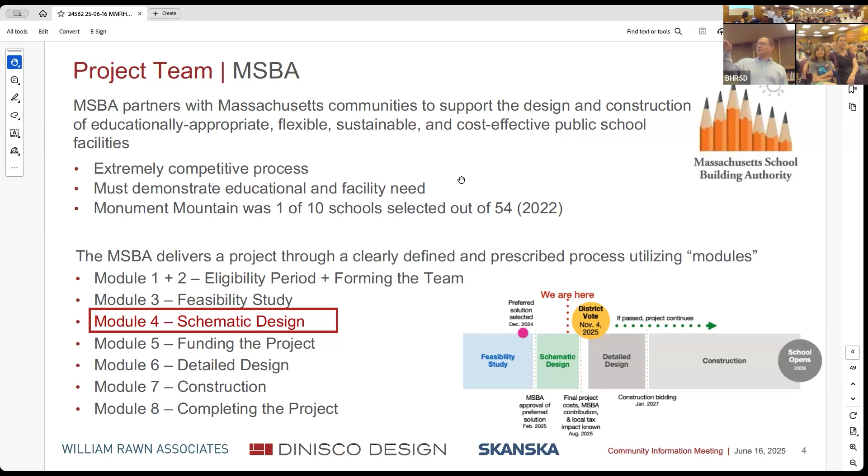Great, thank you. So there's different modules when you team up with the MSBA, module 1 and 2. You can see the eligibility period, forming a team, which we did. Module 3 is the feasibility study, and right now we're at the schematic design, where we're actually seeing what exactly a new building would look like and how it would help us. I don't want to go too long because we have a lot of great slides and information to get to. But that's basically where we're at. The next step would be the funding, which is a vote on November 4th for the communities to decide if they want to fund this project, and we'll go forward from there.

So again, Monument, what we need, there's broad consensus that we need an updated school. This was realized 15 years ago. The school was created in the late 50s, early 60s, educational model, opened during the 60s. For the first 30 or 40 years it served its purpose, but it's come to the end of its life cycle.

It does not meet our current educational needs. It limits our ability to support high quality learning. And it's the only high school in Berkshire County built in the 50s, 60s, or 70s that has not been either completely renovated or replaced.

In Williamstown, Mount Greylock had a complete renovation as well as a significant addition. Wahconah in Central Berkshire has a completely new school, and Taconic High School in Pittsfield has a completely new school. Those are the other schools built during this time period.

This school right now is not a reflection of who we are. It's an aging facility that has exceeded its useful life, and to continue to invest in this outdated building with limited educational benefits is just a bad return on investment.

We've really come to the point, and there's all this information online. I'll be happy to talk with you after, but we've come to the point where this building has gotten to the end of its useful life.

And to just fix up this building to basically get a new HVAC, new roof, bring it up to code, the price there is basically the same as if we've just built a new school. Again, we can talk about that after if you want.

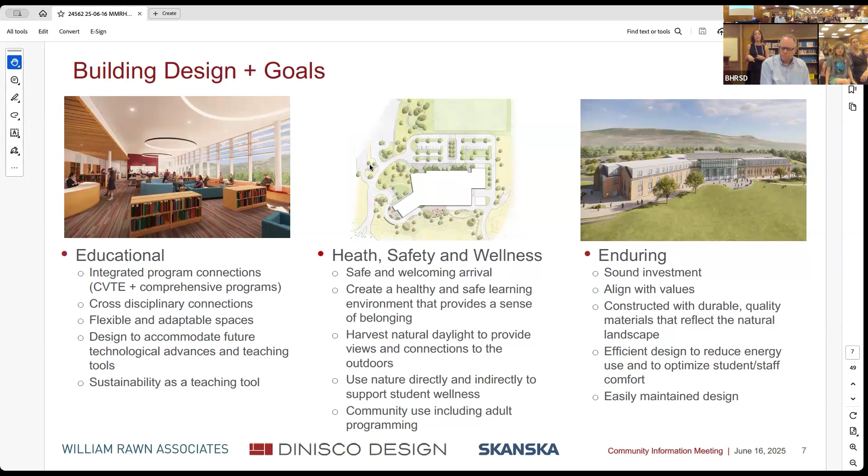From a sustainability perspective, the state is driving a lot of sustainability decisions in our day-to-day lives, but it was really important that we think about the future for this building as well. It will be an all-electric building. We will utilize ground source heat pumps, also known as geothermal, similar to what you have here in the district, but this is an updated technology and newer version.

It was important to make sure that we reduce our carbon emissions and embodied carbon and create a healthy indoor environment. We have already registered with LEED, and we are targeting to be LEED Gold certified, which is really impressive for a building this large.

We're tracking energy use to be very, very low, 25 EUI energy use. Standard baseline schools in Massachusetts are in the 50s and 60s. So we are tracking and making sure that every decision we make is also a good decision as it relates to sustainability.

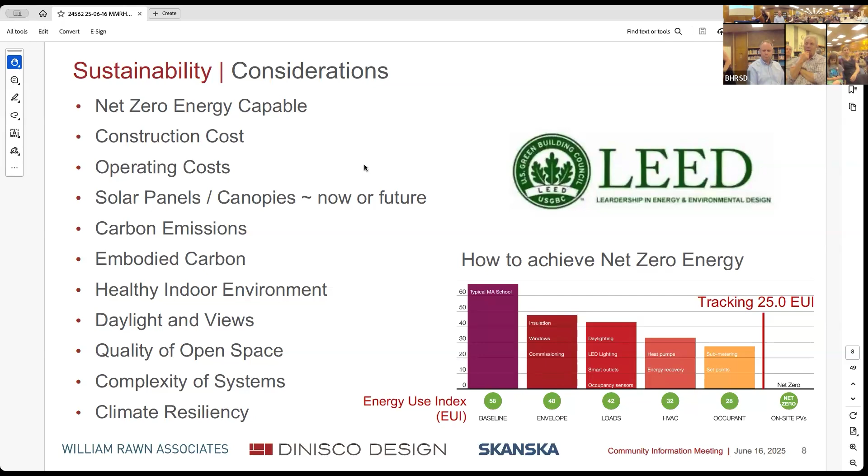We actually started back in February. We wanted to test the ground to make sure it would be able to accommodate ground source heat pumps or geothermal. We drilled one well. If anyone drove by, you'll see these massive rigs that were on the site in February. We're really excited to say that the conductivity of the wells is allowing us to do this, and it will be successful.

Not every site can accommodate these ground source heat pumps, but you can see all the dots here represent about 110 wells that we're anticipating needing. We have one drilled, so now we need 109. I feel like 99 bottles of beer on the wall, sorry.

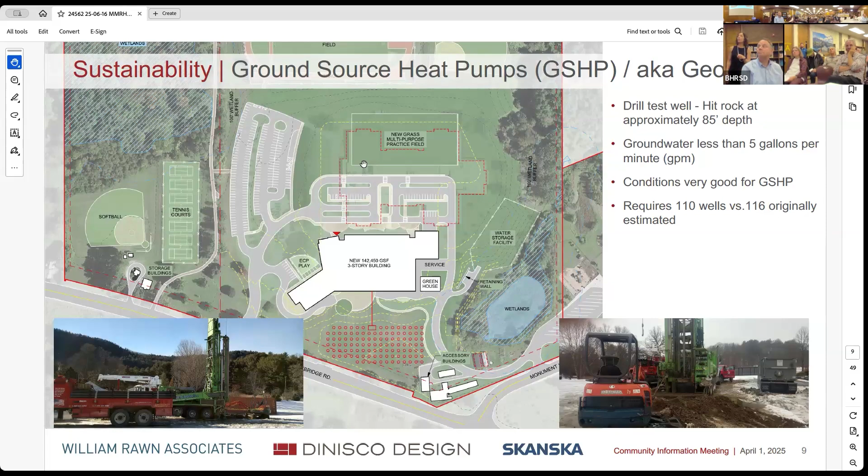The new school, I'm going to jump to this slide. The new school is going to be located, you can see the dotted red line, that's your existing school, right there if you can see it. We're going to be building it directly in front of it, to the west, building it into the hill to take advantage of the topography to help reduce costs.

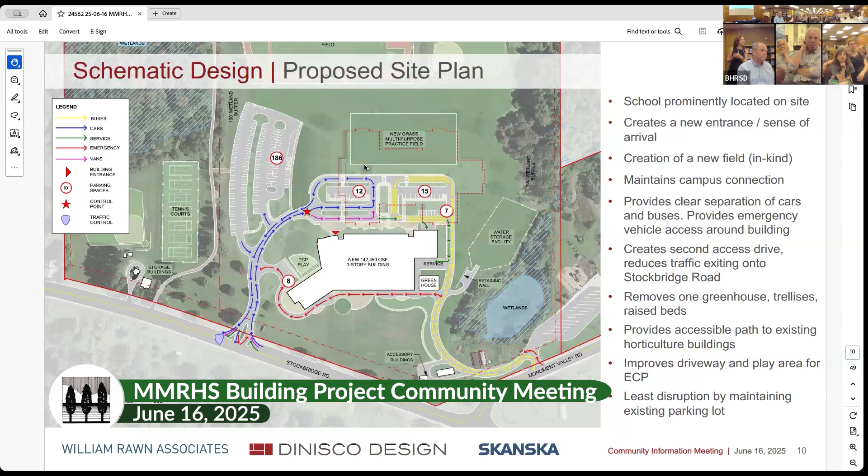It will be a 3-story building on one side, 1.5-story building on the front side. We'll show you some renderings. There are some renderings over there, but we have some that will be easier to explain as we go through it.

Our goal from a cost perspective was to utilize as much as we possibly could with your existing attributes on the site. We are going to maintain the existing parking lot. We'll build the new building in front of the existing building, which will remain in operation while the new school is being built.

And once the new school is built, we'll move everyone in, demolish the existing building, and then we'll be able to actually put another practice field in its place. We have spent a lot of time working with your first responders, your police, your fire, state troopers, and the school department to make sure we could improve upon your site circulation.

We're continuing conversations with the Department of Transportation about the entrance of the school. So for now, we're trying to find ways to really reduce the traffic congestion that occurs on site. We now have 2 means of egress onto the site.

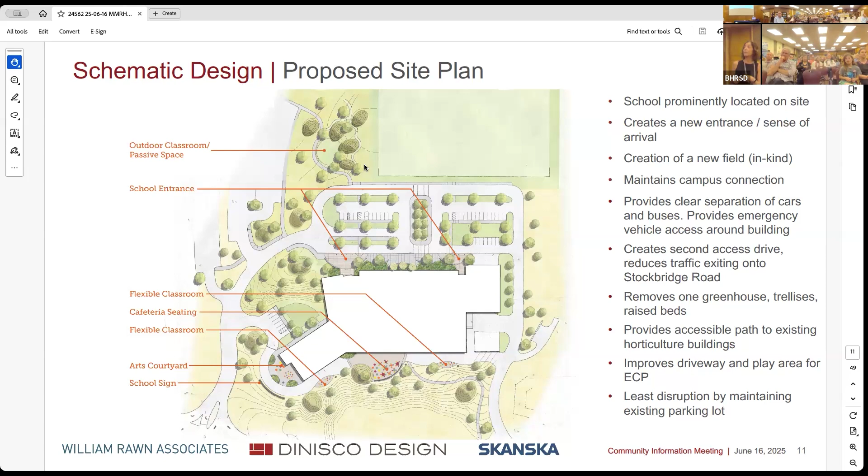We'll talk about whether there are other opportunities on site. The full site will be accessible. Right now your site isn't accessible for anyone, even coming from the main parking lot, so we'll have path and pedestrian accesses, making it fully accessible.

Right, guys, you're seeing this, right? You're seeing the struggles. Here is the view—thank you.

The school is going to be a 3-story school facing Monument, facing Stockbridge Road, but the main entrance is going to be on the middle floor, which we're calling the ground floor. So you enter on the middle floor, and this is the driveway coming up.

The parking lot is over here to your left. The main drop-off area for parents and buses is along this axis up here that you can see.

We have the main office located at the very entrance of the building—no longer, for anyone that took a tour, you probably had no idea where the main office was, right?

So we'll have the main office at the front of the building. It will be a secure, double-locked vestibule to make sure that people coming in have been vetted before they're allowed into the building. Main administration will be located here.

On this main floor, it was really important to provide all the community spaces. We have the auditorium right in the center, adjacent to the gymnasium in red. We have the PE alternatives, which will be a weight room and fitness center, which could also be used for community access. We have our chorus, band, and piano theory classrooms adjacent to the auditorium for those connections. And then the automotive program, as I was pointing out, needs public-facing access to the driveway, which will also be located here, shared with the new electrical CVTE career tech program.

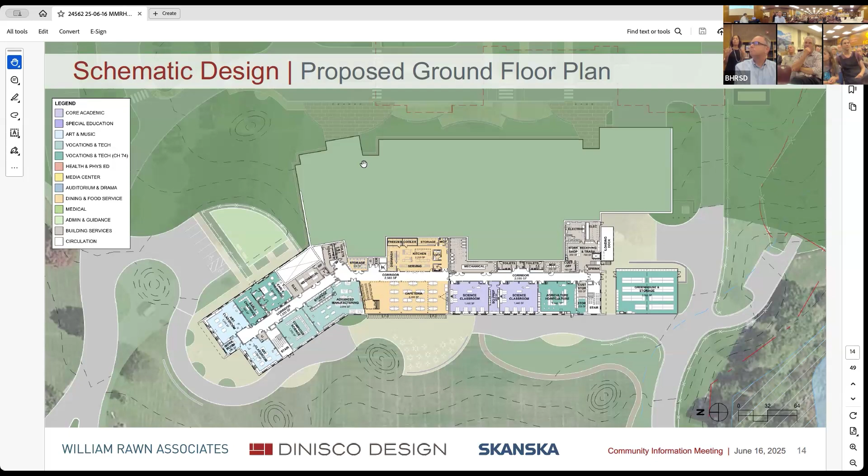You can see we were really thoughtful about the placement of programs. Every single classroom will have windows — everyone is going to have natural light and great views. We were also very thoughtful about what you're seeing in brown, which we call service areas — these are the mechanical rooms, storage, and receiving. Those spaces don't require natural light. We're also taking advantage of the topography of the hill to reduce site costs.

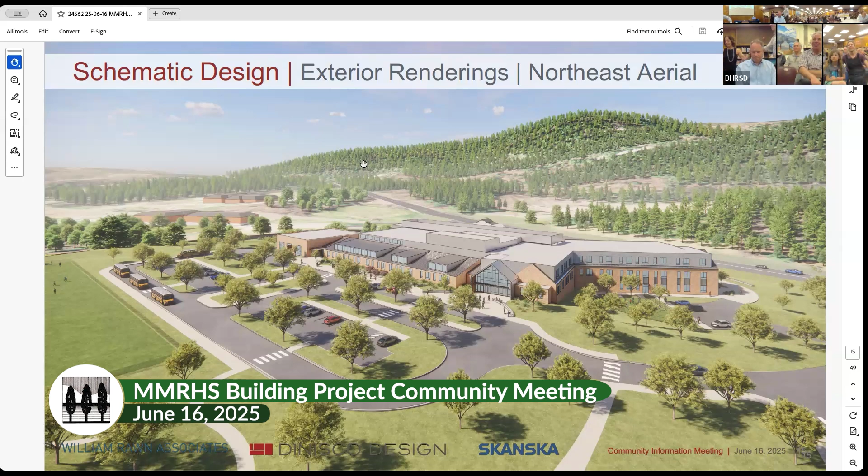So I was going to share some exterior views of the building. First of all, I want to thank the exterior design subcommittee and the school building committee — it was a great collaboration, both of our firms working with these groups, with a lot of feedback over several months. So that's what you'll see here.

One of the major goals was to make the high school welcoming to all, using warm materials — really trying, as you approach it from Stockbridge Road or come up the drive, to make the entrance intuitive.

This is a view from the northeast, looking at that main entrance. We worked to make that entry transparent and open, so much of the glazing or glass was placed at the main entrance. You'll see in a moment, on the other side, views of Monument Mountain, which you can see in the back of this rendering or in the distance. Just for reference, the elementary school and the middle school are off in the left corner.

There's a pointer — yes, okay. This is, as Donna described, the field to be relocated, so it will actually be closer to the existing playing fields.

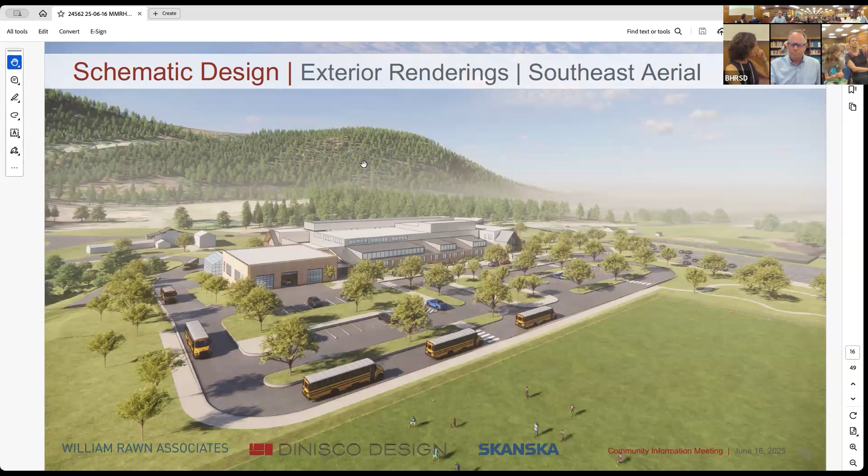This is a view from the southeast. Here you can see the drive coming up from Monument Valley Road and the existing greenhouses — this is where the buses will queue up. On this side, you can see the automotive CTE program, which has some parking spaces here.

That's the main school entrance. This is a view down at driveway level, looking at the main entry. It's welcoming—there's a bench, quite a bit of open space when the students are dropped off.

To the left are the music spaces. Again, Donna said it's about a story and a half on this side of the building.

Andy, may I—there's a question, hand raised online. Yes, if they can hear us, Brian, maybe you can unmute them and they can ask their question.

Hi, Sam Ernston, Great Barrington, Division Street, and a teacher at the middle school. What is the benefit of building into the hill?

Sure, thank you for the question. Building into the hill—it's a compact site. One thing it allowed us to do is maintain the existing parking lot, reducing cost for site development. There's also great views. The parking and that field will be behind the building.

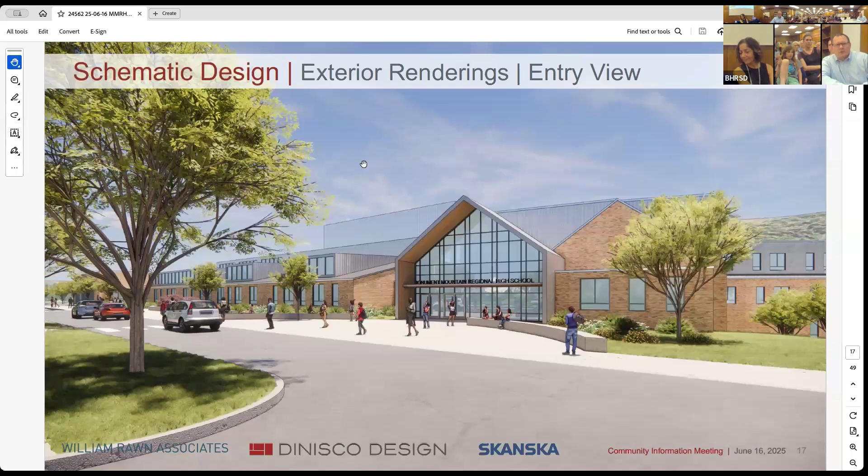Does that answer your question? Yes, it's the least disruptive. And Sam, one more thing—the other option for a new building was where the current parking lot is, so that would have cost more, maybe a couple million dollars more. But also the vast majority of teachers at Monument chose this design and felt it was better, their first choice. So we really went heavily off the teachers' desires. Thank you for your question.

It's the view of the building as you enter off of Stockbridge Road. This is the northwest view. There's early childhood education and an entrance here. You can see just beyond the landscaping a few cars—that driveway goes up around, and the main school entry is up here.

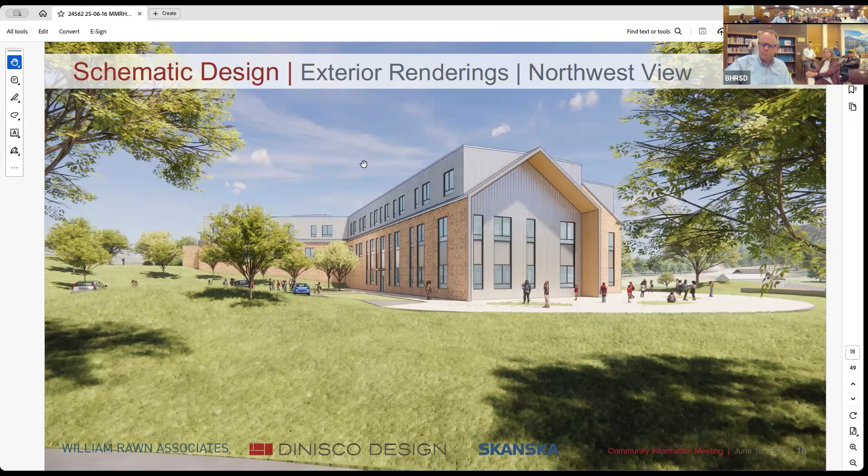This is hardscaping that wraps around to the west side, and that outdoor art space is down on this drive. This is the view up the driveway. The greenhouses—whoever's taking this photograph or rendering, the greenhouses would be behind you—looking at the cafeteria and the library above it.

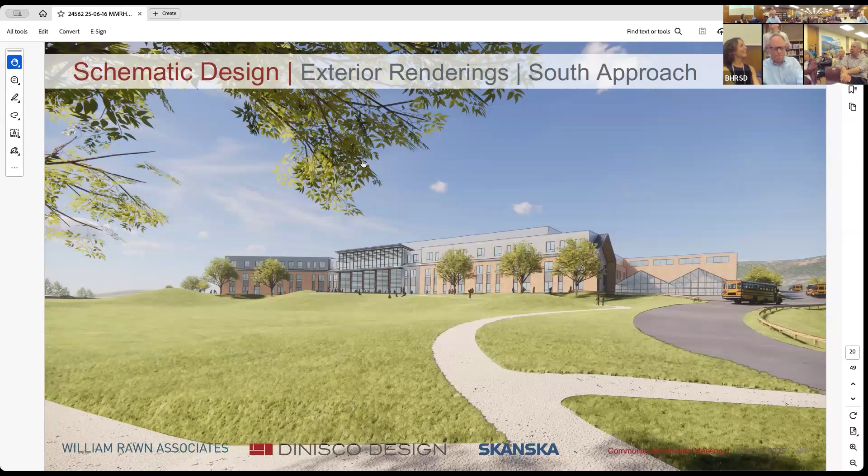As I mentioned, you'll see in a moment that the focus of that western facade really is the heart of the school, right in the center, where the library and cafeteria are located. You can see the greenhouse off to the right here.

This is just getting closer. There is topography out here—about half the hill that's out there today will remain, about 15 feet. The landscape design does include some mounding here. Again, that's a design feature, but it also allows us to keep some of the soils on site, reducing costs.

That's what you see from the road—the new drive on the right side of the building. The bus drive, as we pass the greenhouses, the existing greenhouses.

You'll see the facade is crenellated there—we call those the sawtooth windows. The reason for that is they're facing Monument Mountain, so there's a direct view out of those bay windows when you're inside looking out.

I have one question—so the main entrance is on the opposite side of that? Yes. Okay.

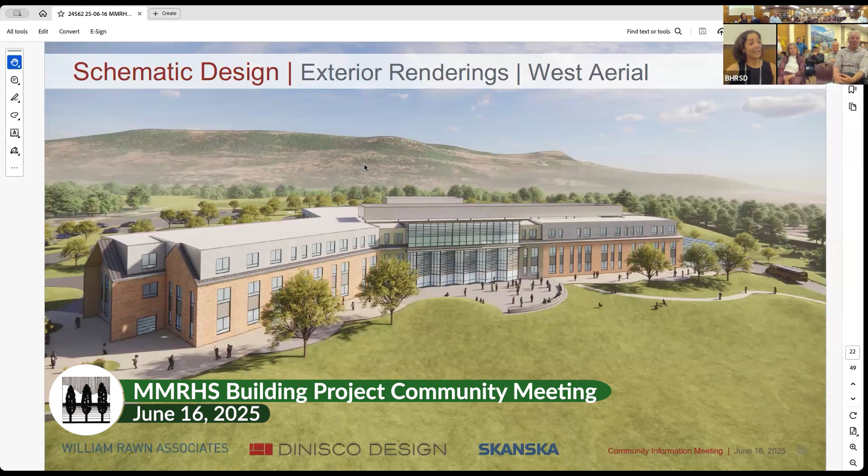Does the auditorium have a stage? Yes, and we'll show you. We've got some wonderful renderings.

Alright, great. So we have some initial views of the interiors of the building as well. Now, the final materials and colors would be determined during the construction documents process, but we've made some initial selections just to kind of convey a flavor of all these different spaces.

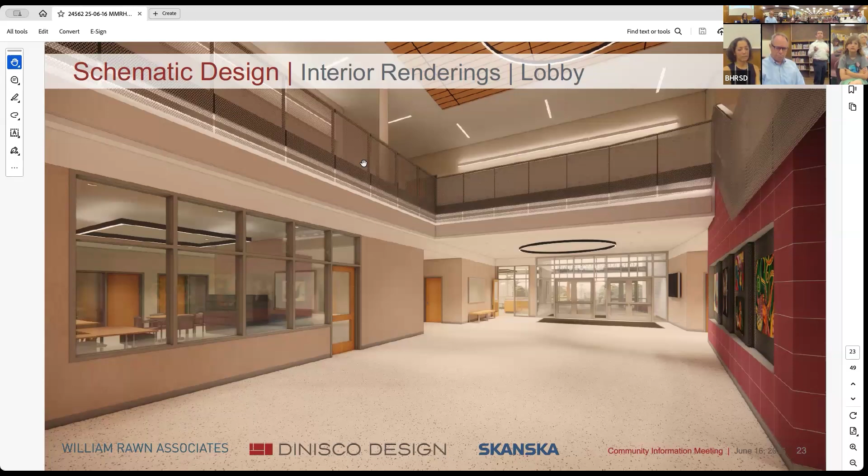So above this would be one of those clusters of 4 general classrooms. If we turn around 180 degrees and look back out to the west, this is the view towards that double height glass that we saw on the exterior elevations. So down on this first floor is the upper cafeteria, and above it is the media center, which is really the focal point of this long lobby here.

To the left of it is the auditorium space. So this long lobby is doing a lot of different jobs - it has the ability to serve as gathering space before, after, and during functions in all of these big public spaces throughout the building.

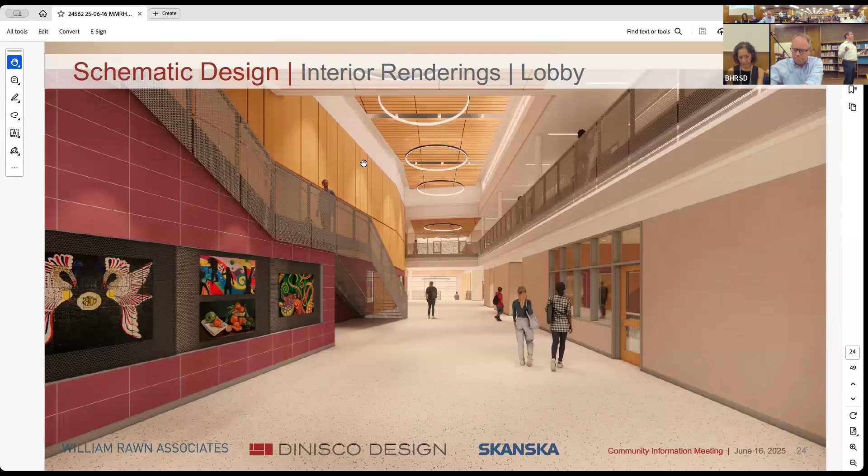No seats in the hallways? No seating in the hallways? Again, these are initial views - the question was, there's no seating in the hallways.

So these are some initial views to kind of get a feel of the space. We still have furniture selection to do. There will obviously be some sort of seating near the main entrance to accommodate visitors as people are waiting to come in or out of the general office. Everything might not be represented here yet.

So this is going a little bit further into the lobby. You can see this is one of the walls of the auditorium off to the left. So it's kind of this forum and this main street as the hub of the school with these big public spaces off of it.

And I would just like to say, intentionally, you're seeing some blank walls - those are really for student art, or environmental graphics or environmental art. We haven't gotten there yet, but there was a really strong desire to showcase all of your students' work. So what you're seeing in some of those blank walls is where we envision all of the beautiful student art.

Can we take a question from the front, if that's okay? Sure.

So will there be lockers? The question was, will there be lockers? Wait one second, you'll see. Thank you - not sure we're showing any lockers. Oh, there aren't any lockers?

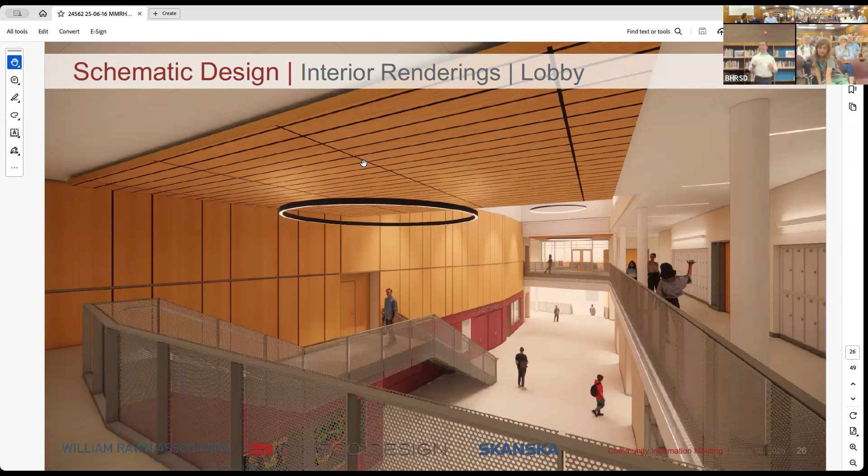So this is a view of the auditorium. Similar to the existing Monument auditorium, you enter on the cross aisle, so we'll enter at the middle of the auditorium with seats down to the left and up to the right.

The main difference is that there's now a mezzanine level on both sides. That's to increase capacity within a compact footprint, and also provide a sense of intimacy within that space, getting more seats closer to the stage.

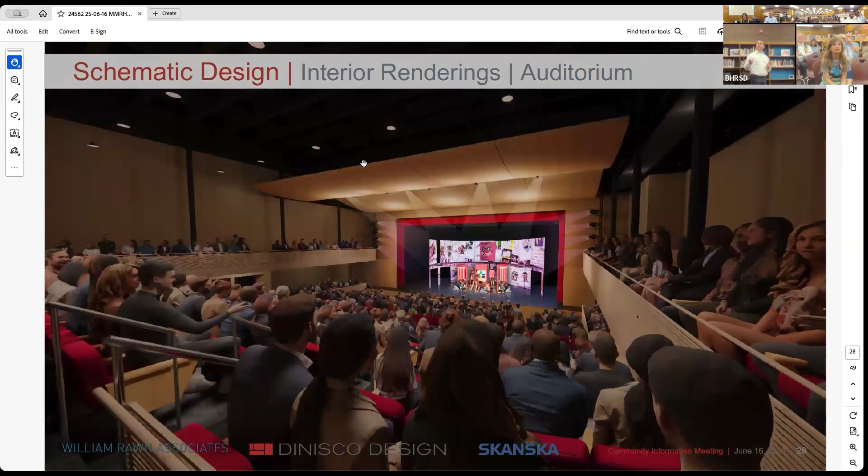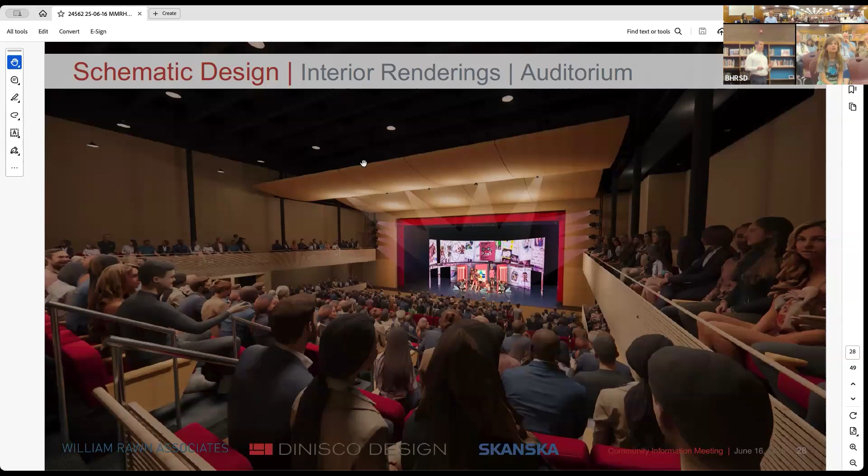This is a view from the back of the house at a performance in progress. You can see the mezzanine on the right and the left. The auditorium will have all modern controls—modern lighting controls, auditorium sound systems, etc.

This is a view of the cafeteria standing on the ground floor. That 2-story window wall is located off to the left of the screen here. There will be doors along that wall so events can spill out to the great outdoor patio space we saw on the aerials. Towards the back of the image is a stair going up to the main lobby, and off to the right on the first floor is the servery—that's the kitchen, and those doors will all slide open during service.

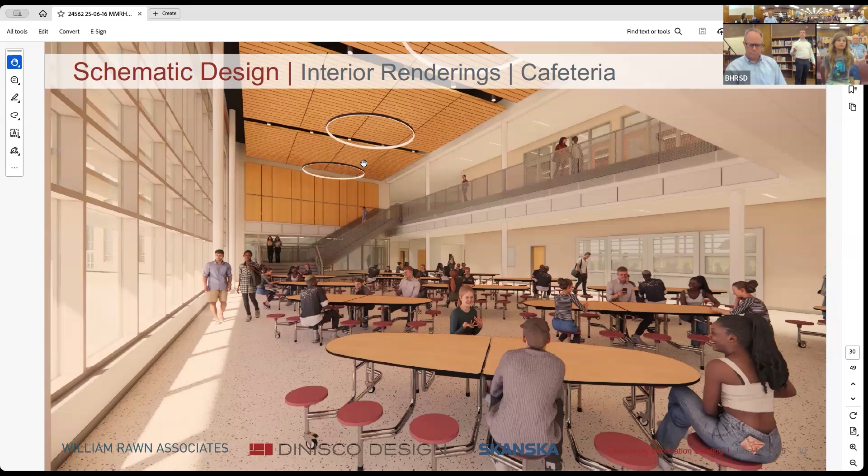This is a view of the media center, on the second floor looking out, with that Monument Mountain view. The center of the room would all be flexible furniture, flexible bookcases, flexible tables to be configured however it would need to be programmed. There's an area similar to this setup, which would be similar to a typical classroom with some small group rooms on either side.

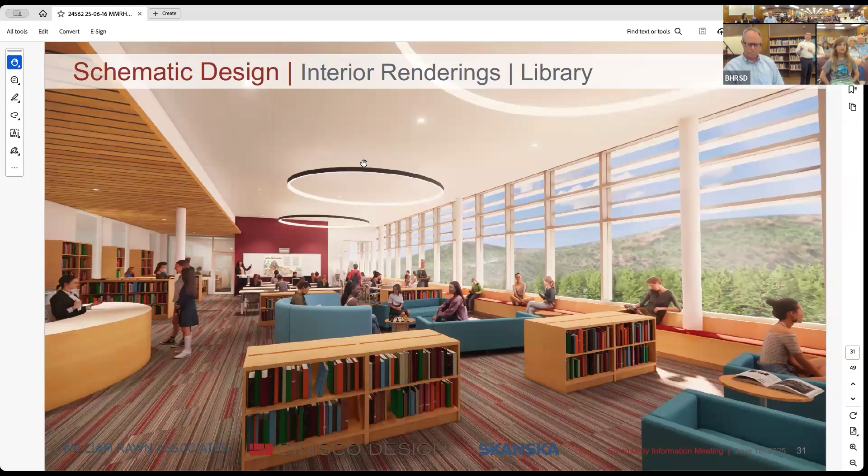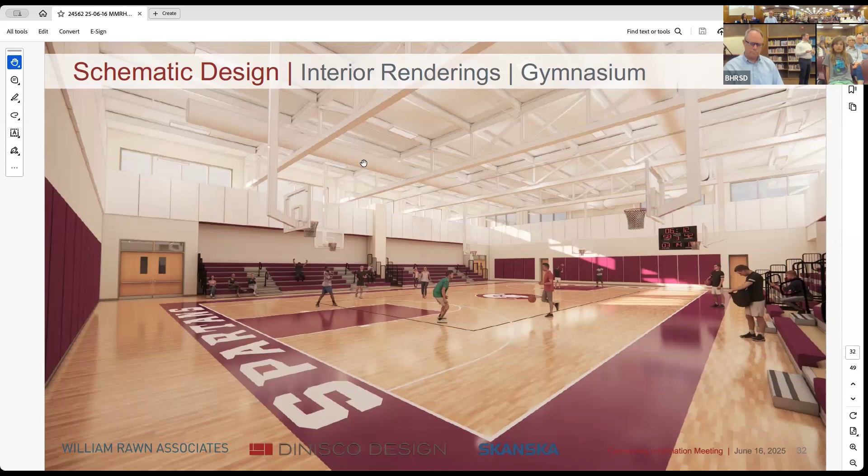This is a view of the proposed gymnasium. The gym is based off of the existing Monument Mountain Gym, with a large central court, some side courts, and additional provisions for additional sports such as basketball, wrestling, and volleyball in the gym. The most noticeable difference is the inclusion of some clerestory windows around the perimeter, which will give this space access to natural light.

It's the same size. The court is the same size, yes. But the seating's a lot better.

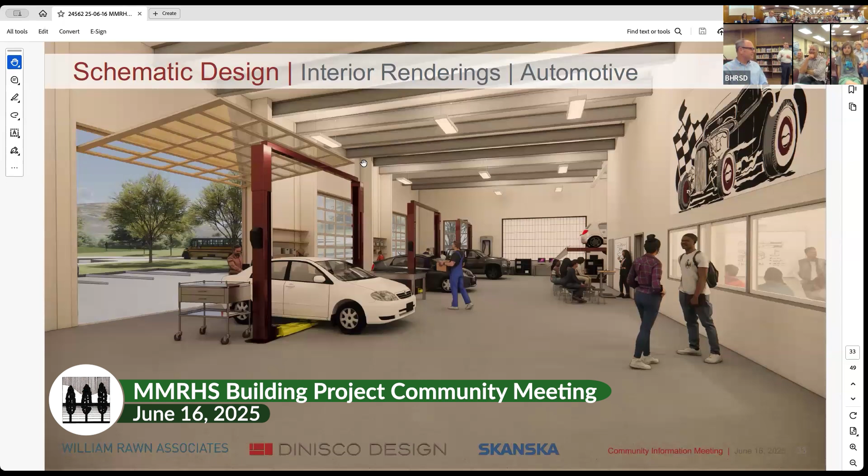This is a view of the automotive shop. The new automotive shop will have capacity for up to 4 vehicles. And the big thing in there is that the height will be appropriate for the vehicle lifts, so they're not banging into the underside of the structure like they currently do.

You'll notice off to the right, there's a small shared teaching space, and that will be shared between the electricity shop and the automotive shop. And there's going to be electric vehicle service at the far end. We're also providing provisions for an electrical vehicle charging station within the space, so that can be incorporated into the academic program.

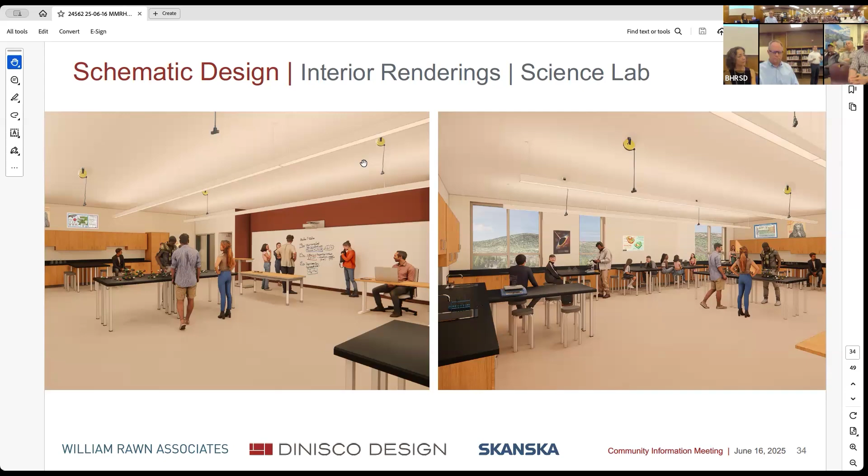This is a couple of views of one of the proposed science classrooms. In the proposed science classrooms, most of the fixed furniture is around the perimeter of the room, and that will include storage and sinks and power and data and gas connections. And then really the interior of each of the classrooms will be able to be programmed for whatever science program occupies that space.

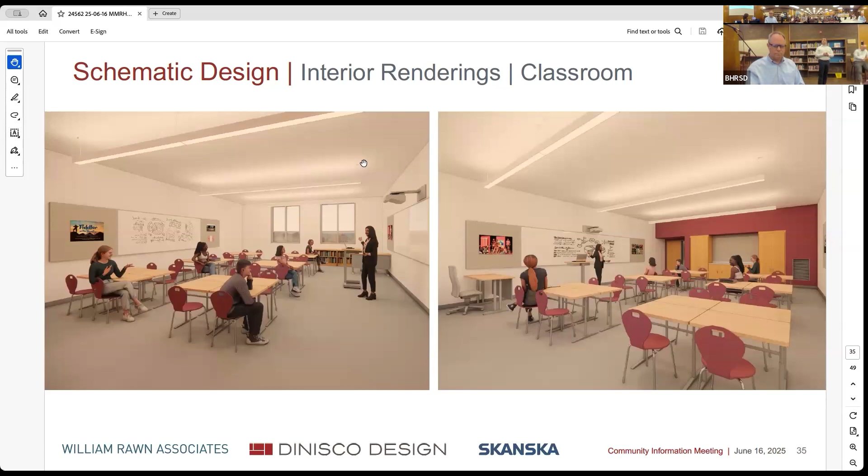So we know people wanted to know how much, right? This has really been an evolution from when we started back almost a year ago. We started what we call preliminary design, which was really basically understanding your program needs, the overall gross square footage as it relates to the Mass School Building Authority's guidelines, and general concepts and understanding of the site.

So in July of 2024, the total project cost was about $180 million. The Mass School Building Authority was contributing $51.5 million of that. You'll see a consistent line item for Mass Save - I don't know if anyone knows Mass Save, but they'll even come to your house and they'll do energy audits and all of this other great stuff. They too also want to see an energy efficient building, so they are contributing about $1.5 million for the ground source heat pumps and just being an incredibly energy efficient building. So your local share back in July of 2024 was approximately $126 million.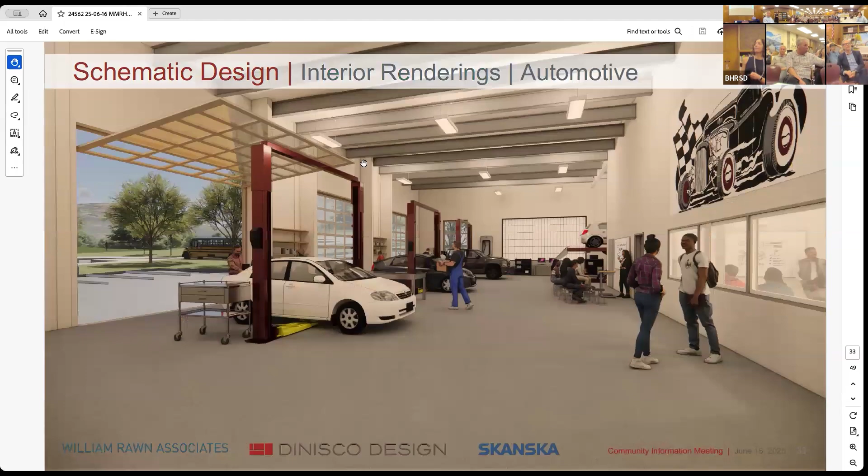Yes, so I think this is a really exciting project. My question is regarding capacity. Someone said earlier that at some point in the school's history it had a student body of almost 700 students. I understand the objective is also to try and get this built and get the funding in place. But just rough math, if the current student body is 440, and this is being built for 480 students, you're talking about only a 10% expandable range. Given what you said earlier about the hope to build a project that could have a life of 50 or 75 years, I'm wondering whether 10% margin will be sufficient for this community's needs for the next 50 years.

Thank you. Actually, as part of our due diligence, we thought about 'if you build it, maybe they'll come' — that would be a really great thing. So we've looked at different ways, and that was another reason why this option was selected over the other option that would be considered in the parking lot — we've been very thoughtful and deliberate about where we're placing stairs and exits. You could actually add on 2 additional classrooms per floor, so that would be 6 additional classrooms at 20 students each. That would give you that opportunity.

If you had other programs, it's really hard — you're not just anything, you're everything to everyone. If you wanted to expand your career tech programs, your CTE programs, there are opportunities to also add larger spaces in other parts of the building. Maybe it could go here. The greenhouse is modular, so maybe it could be relocated and you could put it right here with the other career tech programs, or depending on what it is, it might not be a very large space. It could be cosmetology, and maybe you don't need those spaces, but we have thought about where expansion could occur, and that would be significant.

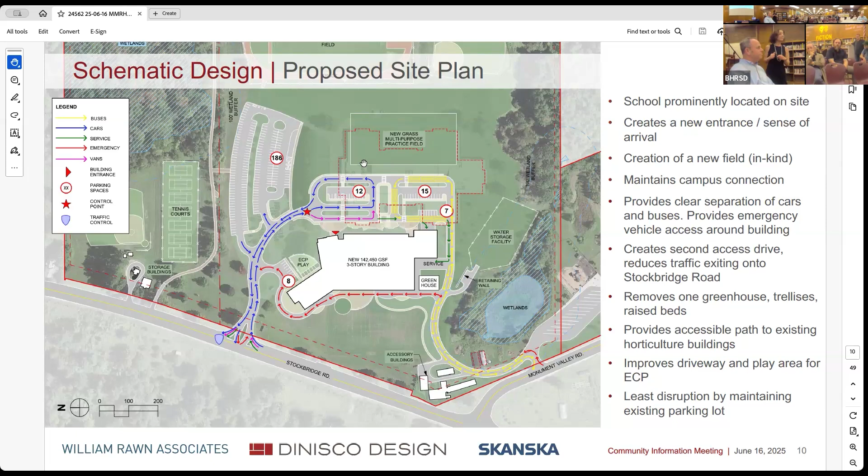I think it's an exciting program, but I'm wondering, have you already suggested that there will be a part of the building that can be used at night so there can be adult education? The question was, have we considered opportunities for after-school use, whether for adult education or other programs? The answer is yes.

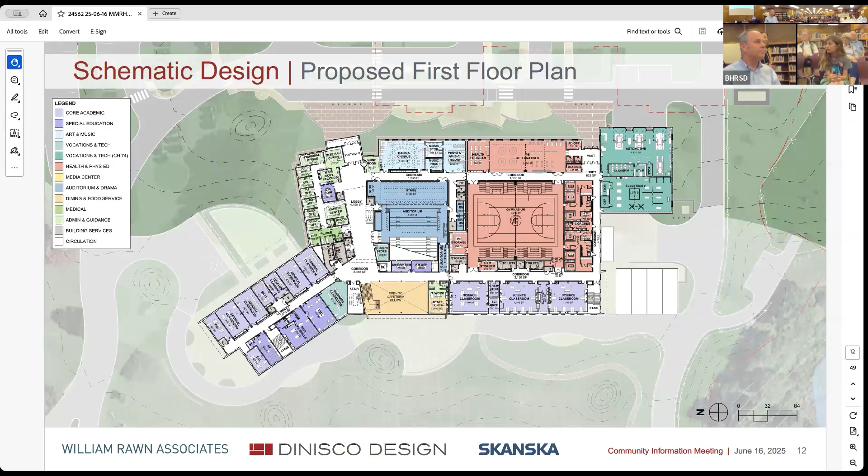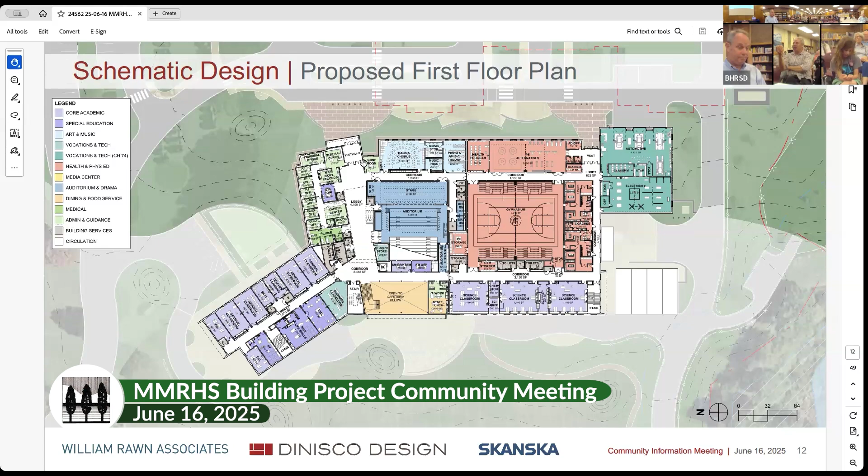You guys have done a beautiful job, you've obviously put a lot of work into it. I have so many questions. What is the projected enrollment for when this would be completed, and for 10 years and 20 years, assuming it all goes fine?

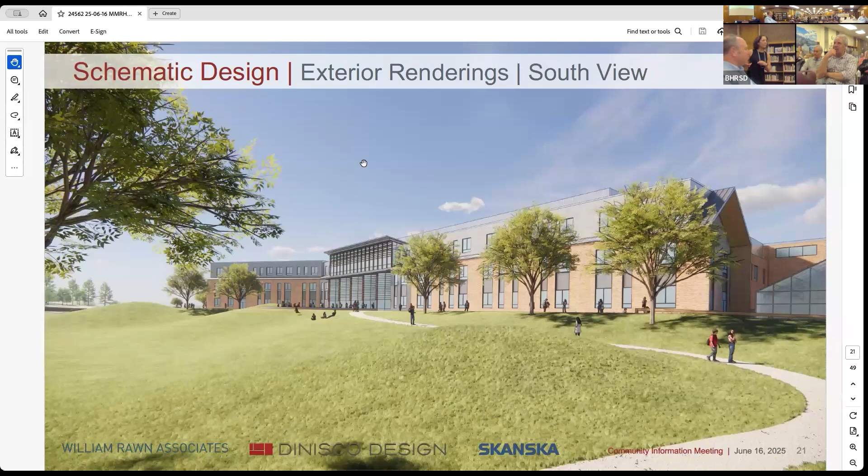I believe the MSBA is projecting that peak enrollment, 485 students, would occur 5 years out from when we started, or maybe 5 years after the school opens. There's also an implicit assumption on their part that if we build it, they will come—that there'll be a little bump in enrollment tied to a new high quality building.

Would that be choice or merged? I think the merge question is largely asked and answered based on 4 of the 5 towns' response.

One comment is it's beautiful, it's also still like it's a lot of money. What's the value added—I'm a very happy parent of 3 alumni, Peter knows all 3. What's the value added from the students' perspective? Are they going to get higher SAT scores? I hate that as a metric. Are there more opportunities for non-college paths? Has that been articulated? Yeah, I think it's all the above.

So the question was, what's the value added, what's the impact of this on students? I think it's in 5 or 6 areas, and I could go on for hours about it, so I'll try not to.

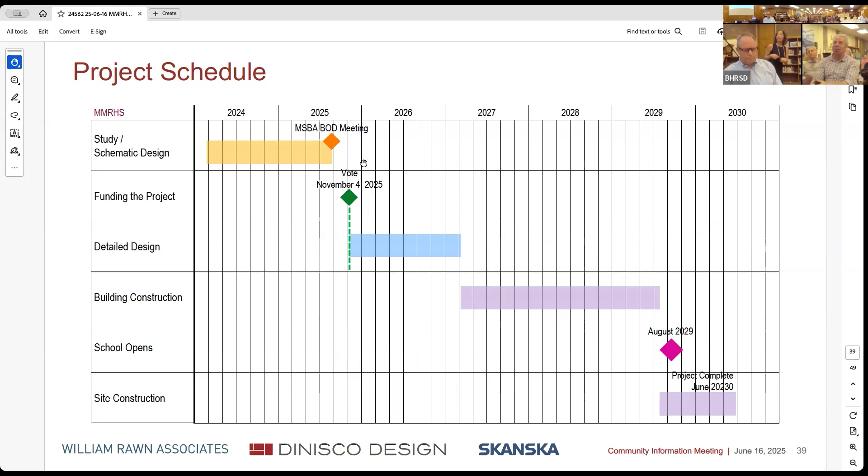We're anticipating the new school will open in August of '29. It will be here before we know it. And then what we'll do is move all the students out, get in, abate, demolish, and then finish the site and put in the new practice field. So, oh, that's a typo.

Anyway, so what's the impact? What grade are you in? I just graduated 4th grade today.

Fourth, perfect, congratulations. So if you are in 5th grade or younger, the 5th grade will actually be the first class to experience the entire new high school for their whole high school career. So 5th grade and younger, project's done, well done, and the school will be fully available. For next year's 6th graders, your next year's 5th grader, they'll be able to really benefit, not fully, but be able to benefit. And as you can see, 7th, 8th, and 9th grade, as a senior, the building will be complete.

You'll be able to experience your senior year in the new building, and still reserve the rights to say there's a pool on the roof. I don't know if any of you ever did that to younger grades, but, right? Did anyone ever tell you that? They always told me there's a pool on the roof.

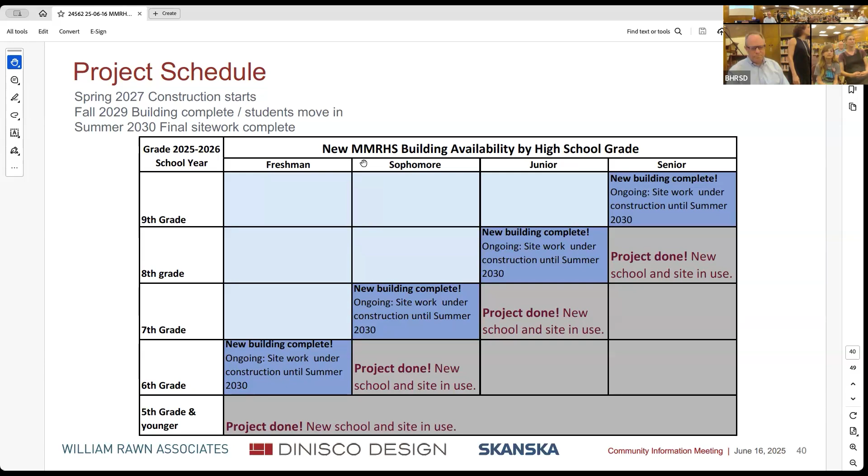And so you can see, it will be here sooner than we know. There will be a lot of excitement, a lot of engagement. We're looking forward to engaging students even at the next phase as we really start to design the school.

Community benefits are what we just left, but significant community benefits, right? The school doesn't even serve the community well anymore. So significant community benefits, not to say from a safety perspective, but campus safety, traffic improvements, and really investing in your children's future and in your futures.

I've talked about our key dates. We are updating the website on a regular basis. We have a QR code there, monumentbuildingproject.org. Just stay connected, we will be updating everyone as more information unfolds. We've talked, and you've asked questions, but does anyone have any other questions?

Hi, I'm Ellen Lar. I'm part of a separate committee called Yes Monument that's just getting started to build community support for this project. We're different than the school building project, which is connected to the school district, the state, and the MSBA. We're just independent residents and people who really want to get the word out. We want all of you, if you support the project, to be advocates and have the right information and facts to talk to your friends and neighbors. So please say hi on your way out, and I'll give you a button and some information.

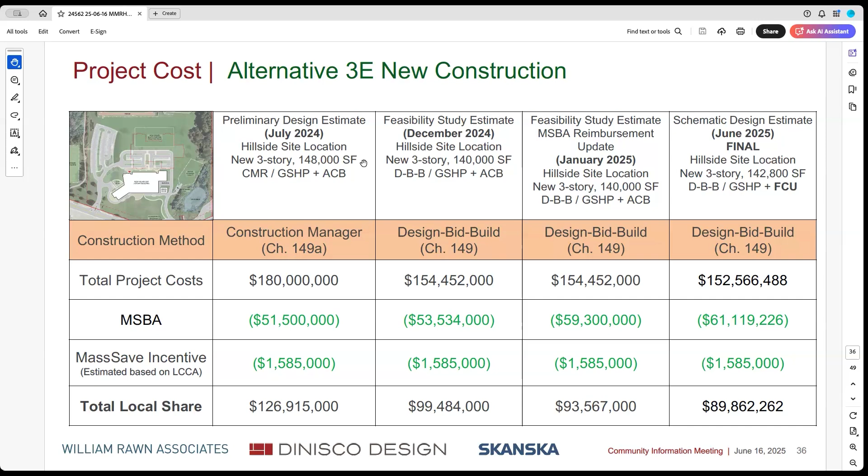I want to go back to somebody's question. I'm very concerned about the capacity question. It seems as if, the school's beautiful, the designs are lovely, and I'm sure you're all very excited, but it seems way too big for our district. You talk about a current high school population, but how many of those are in-district students? And how much of this school is being built for the current, and I would consider unsustainable, model of bringing in a large number of choice students?

So the question Sharon just asked, basically, is how many of our current high school students are Berkshire Hills district students? I want to confirm it because I don't have the numbers right in front of me and might miss it by 10 or so. But somebody else I was talking to before the meeting suggested the number of in-district high school students is 290 or 300.

And then the balance would be 60 tuition students, from agreements with... well, we know they're not good agreements, but... 60, tuition and the rest choice. So our in-district... would you give me a second to answer?

So 290, 300 are in-district students, 60 students are tuition students from Otis, Sandisfield, and Richmond. I would disagree that that agreement is not good—we made significant progress over the years on that. Then the balance of the students are choice students, and that's at a rate for general ed or typical students that's problematic. That's a rate set by the state, and that amount hasn't been changed since 1992.

Yeah, I think it's that, right? And the other thing is the duration of the phasing of trying to bring a 60-year-old building back up to code while it's in use actively with students and staff. Living through a 10 or 15-year renovation project would be a nightmare. Inflation too, right?

I worked in a school in New York a while ago, and we replaced the science labs and closed off a corridor with 6 classrooms for the better part of a year. They worked at night with plastic up, and then at 4 in the morning they came in and tried to wipe up all the dust so we could go on with our day. That was terrible, and that was just 6 classrooms for 1 year.

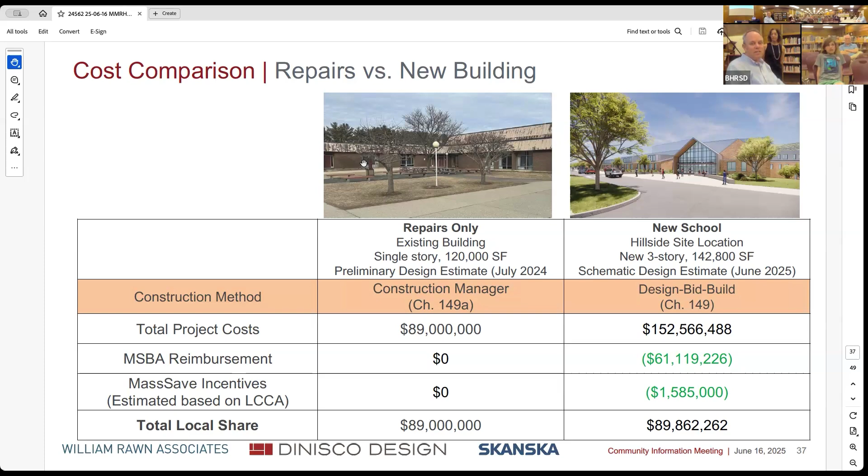And in that one, we got a lot of work done in the summer before and the summer after. So the weak alternative would almost be untenable.

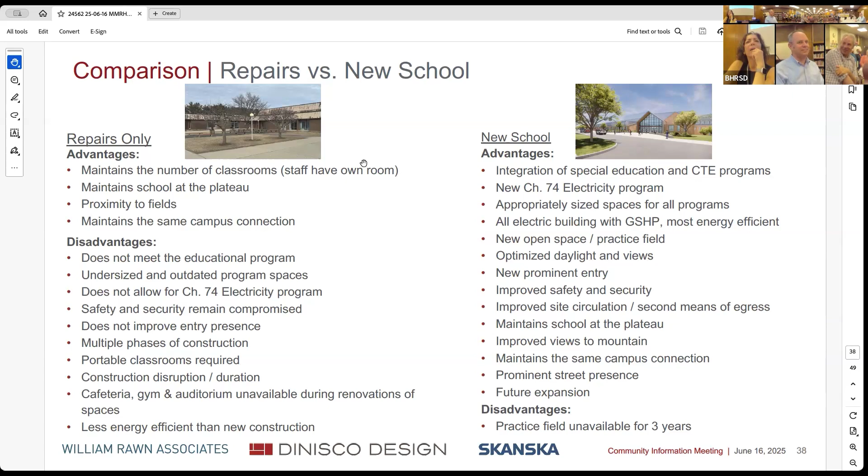Where will we sled? Part of the hill on East Street. That's the only discernible disadvantage I could come up with, some of the sledding. Half the hill will still be there. So it'll be safer, and less of an insurance risk.